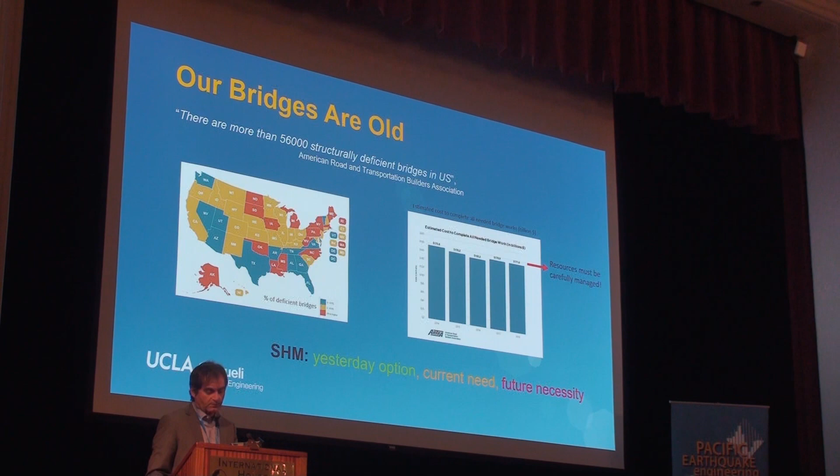So many of the agencies who own these assets used to look at these maintenance efforts and monitoring, structural health monitoring, as an option that they would do or not do. They did not necessarily believe in it all that much, especially instrument-based rather than vision-based methods. And I think the agencies are currently thinking about this as a need. Structural health monitoring became a need in their portfolio. And I believe, given the increasing vulnerabilities and exposure, and of course reduction in sensor costs as well as improvements in inverse problem solution methods, I think they will soon start viewing structural health monitoring as a necessity.

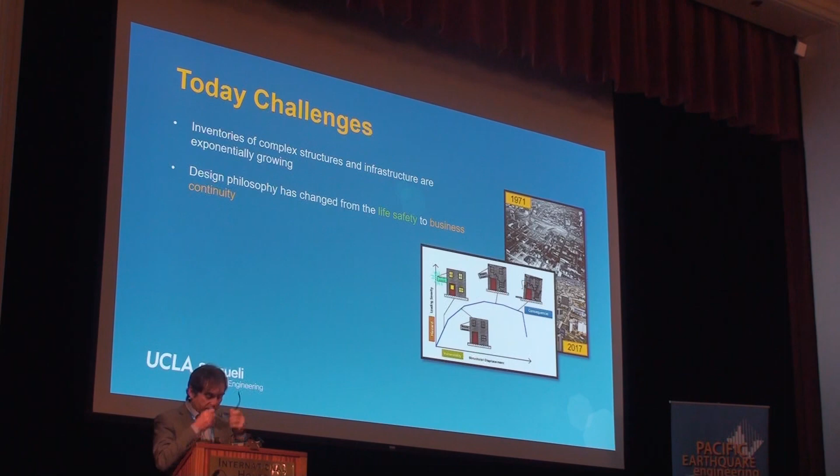So inventories of complex structures and infrastructure are exponentially growing. In maybe some of the Western developed countries, the growth is not necessarily exponential, but there are many countries in the world that are building like crazy. And then the design philosophies have been changing from just life safety and collapse prevention to business continuity, which means the performance requirements are increasing. And to be able to meet those things, we need to really monitor the structures more closely to see whether they're degrading or they're meeting their performance criteria.

And losses and closures will cause indirect costs, and through our regional assessment methodologies, all the talks that we have listened to yesterday and today, we know that the indirect costs are immense. And maybe we're just realizing or are able to quantify these indirect costs. And I think when we bring this information to the forefront, maybe structural health monitoring is no longer going to look like a more expensive option that the agencies have shunned in the past.

What is the current practice? The current practice is pretty much a periodic inspection that involves sending somebody there and looking at stuff. And as you can imagine, it's a time-consuming, labor-intensive, and necessarily an expensive affair. And you can only inspect structures periodically, not continuously. So if something happens in between, you're going to miss that. And things can collapse, and that has happened. In Italy, it has happened. In Minnesota, it has happened. When you do visual inspections, often you have to close the bridge to traffic, so this is going to cause service interruptions. And last but not least, the assessment is typically subjective and prone to human errors.

You can send to the same bridge two different people, experts, engineers. They may come back with different assessment results. And of course, you have the invisible damages.

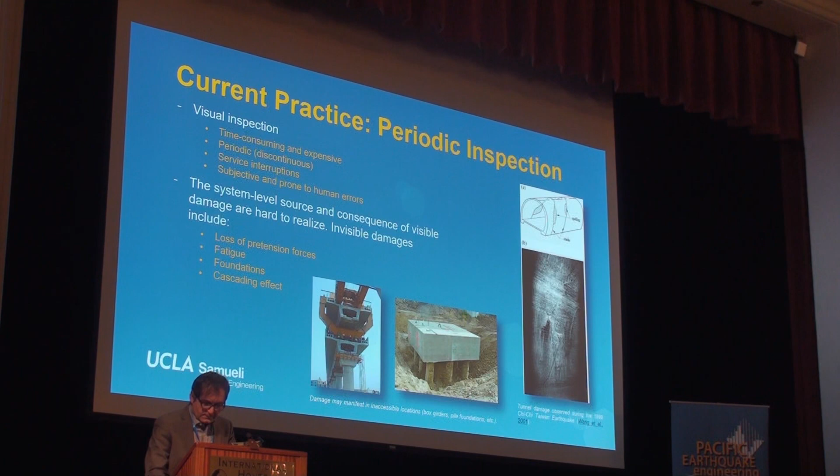If there's damage to a pile foundation after an earthquake, you may be able to get some evidence of that from a distance, from afar, by just looking at stuff. But you'll not be able to quantify it necessarily. If you have a tunnel lining that cracked, what does that mean? Does this mean that there's an imminent danger, or we can just kind of paint over? Now these will be things that periodic visual inspection is not able to catch.

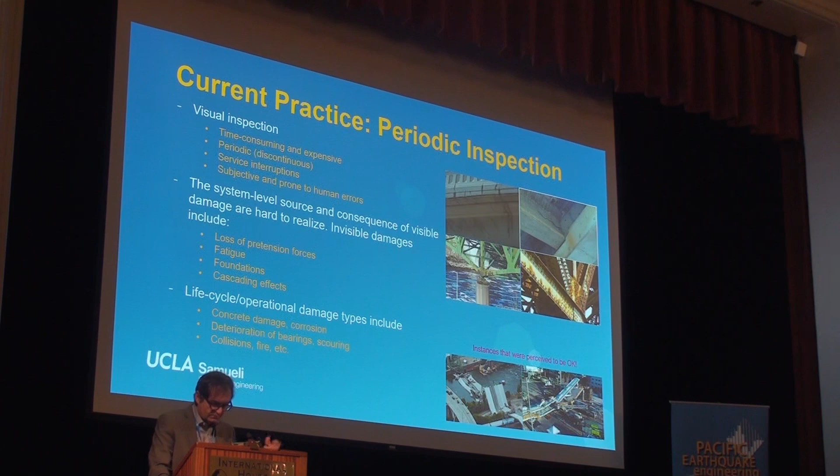And as I was mentioning, things have collapsed in the past, and these assets were being monitored through the current practice, so things have fallen through the cracks, if you will. After a major event like an earthquake also, we have the job of assessing damage and prioritizing which structures and bridges need to be repaired, whether some asset needs to be closed for service, like a rail line.

For example, in the Tohoku earthquake in Japan, Japan Railways had to inspect 1,400 different locations to be able to give a green light to the trains to begin. And if you don't have 1,400 people, expert engineers, that's going to take a long, long time.

So a health monitoring system together with its method, not just the sensor system, but the software, should allow us to detect damage, whether there's damage or not, and allow us to localize the damage. Where's the damage in all of this big system? Is it in the foundations? Is it there? Is it here?

But most importantly, the ideal system should allow us to quantify that damage, put numbers on the table. If there's a strength degradation, what is it? Is it 80% of the nominal, or is it 5% of the nominal?

In the interest of time, I'm going to speed up a little bit, but there are many threads in this world of structural health monitoring. One of them is the sensor-based solutions. We have seen different sensors that people are trying to synthesize. In the sensor-based solutions, you put a sensor at a place where you think something important or bad is going to happen, and then you can continuously monitor that.

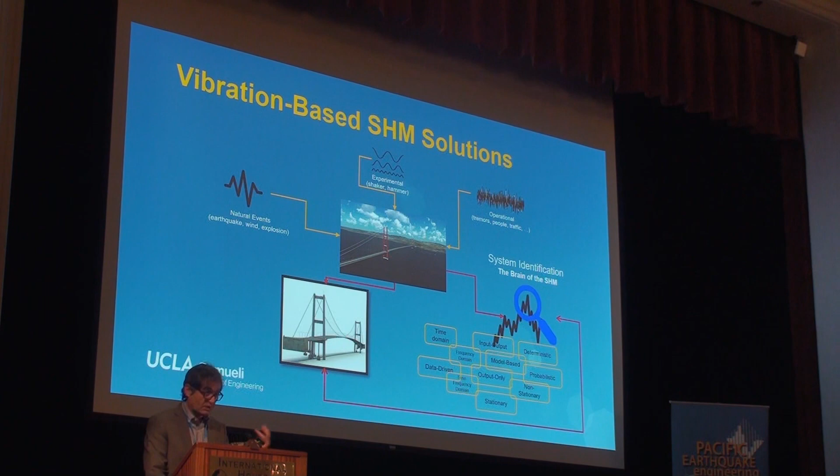And the data that you're collecting, you can interpret through a plethora of methods, some of which are useful, some of which have been invented as mathematical curiosities that do not really apply to real life. But you can interpret the data through different methods and then do the job of detection, localization, and quantification.

In this vibration-based structural health monitoring world, there are also different sub-threads. One of them is to just look at the sensor data and look for anomalies. So you can employ artificial intelligence, machine learning, or establish some threshold values to see if the sensor reading is off of that. The other one is operational modal analysis. And these two threads have severe vulnerabilities and very limited applicability, in my humble opinion.

The data mining approach, the data-driven approach, is training data dependent. They're not really predictive. They have large and yet unquantified uncertainties. There's really, again, no system level insight. And it also requires dense sensor installation. That works in our human body. We're organized in such a way that we have nerves everywhere and a really big brain. We can't really replicate that in the real world yet. So we cannot rely on these methods.

Operational modal analysis has also been the method of choice in my research community. But it is really also vulnerable because it has been based on very restrictive assumptions, which is that the response is linear because you're doing modal analysis. You're solving an eigenvalue problem that assumes that the system is linear, but the system is often not linear, especially when it's damaged.

And the most severe assumption is that the input exciting the structure is broadband white noise, and it never is, especially when there's a damaging event. If you have a high wind, that's a non-stationary, non-white noise, colored excitation. So if you're doing operational modal analysis to identify this or that, your results are all polluted by this mismatch of your model and method to the physical reality.

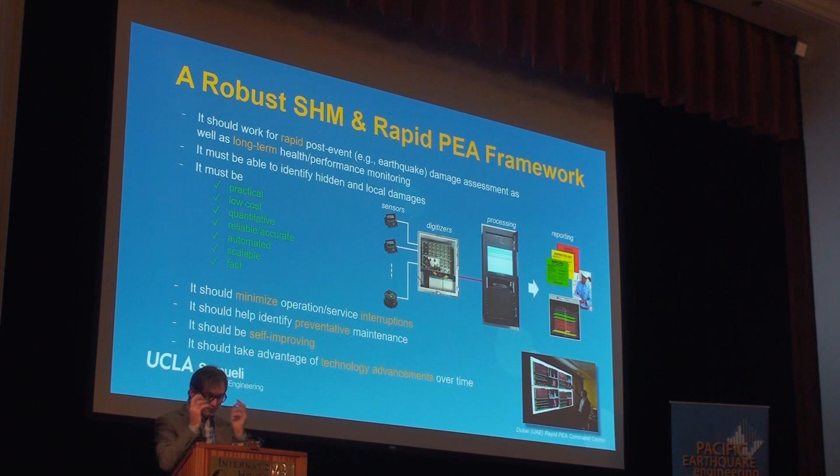And if your damage signature is below that baseline, you can hardly ever classify that signal as damage because that's just the baseline moving around. So if you don't have a system that adapts, uses all the accumulated data and understands the system better, it's not going to work out. So our approach has been, and we came to this little nook by making all the mistakes that I'm mentioning above. So it's just like a painful, but in the end rewarding, I think, journey to learn from the mistakes.

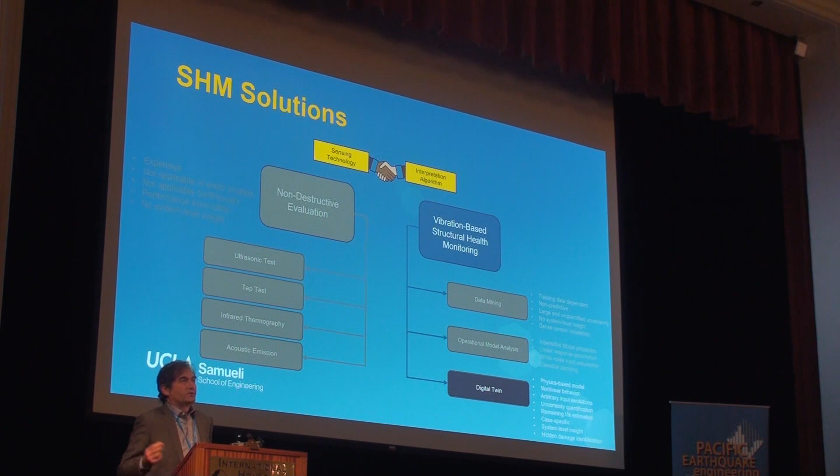But now I think personally, and some other people would also join me in saying, that we need to really use physics-based models. We should be able to consider nonlinear behavior, should be able to consider arbitrary input excitations that are non-stationary. We should be able to not only estimate the level of damage, but also provide our uncertainty of that estimate. You know, if I tell you the damage to the beam-column connection, the strength is degraded by 15%, but my uncertainty is plus or minus 50%, that's probably not a good estimate, right? So I need to be able to say what my uncertainty is as well.

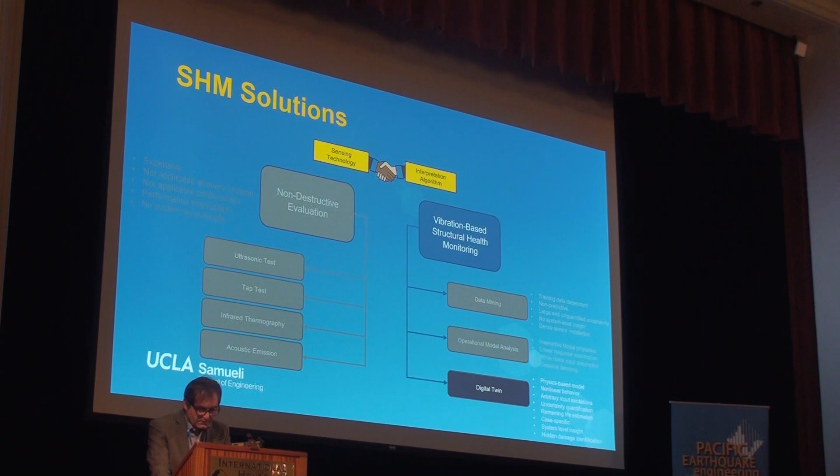And I should be able to also tell you through my observations what is the remaining life of this particular member. How many times has it been cycled towards the design limit, to a certain threshold, so that I can do fatigue and life estimates. It has to be case specific, it should be able to handle earthquakes, winds, etc., and provide us with system-level insight and allow us to identify the hidden damages.

So this is just a list of the things that I have done with my group over the years and with some colleagues, but to get to where we are, it took us more than a decade of study and learning from other people. Right now, in a nutshell, we have a digital twin-based damage identification and health and performance monitoring system that can address different needs. We can do operational condition assessments. We can also do rapid post-event assessment. These are different modalities, and they require different sub-algorithms to handle.

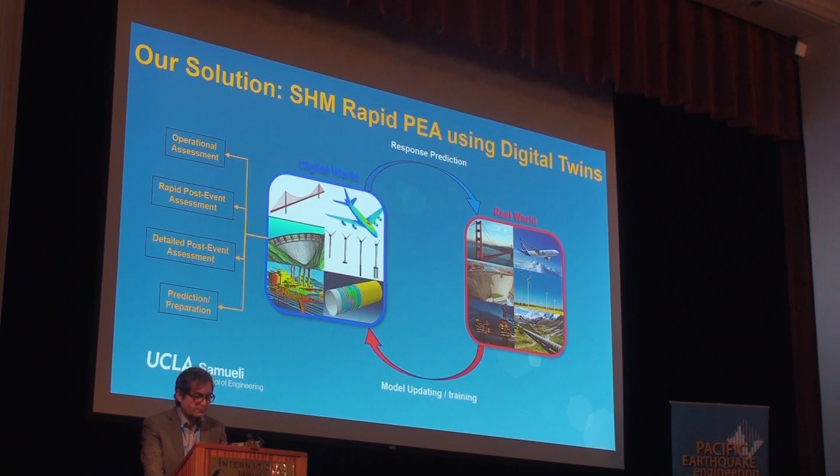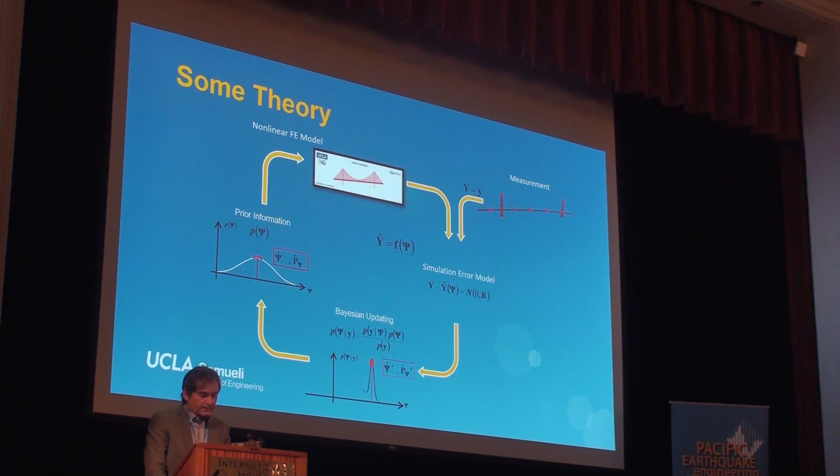We can also do detailed post-event assessment, and we can also do scenario-based prediction and preparation using the updated digital model to see how it might behave in a particular type of future earthquake that hasn't happened yet. There are a lot of mini algorithms stitched together supporting the system, but this is the overarching algorithm, which is Bayesian estimation theory. So you create a model, and the properties of that model are represented by a probability distribution function. And then you make observations and you update the probabilities, and your estimate gets better and better.

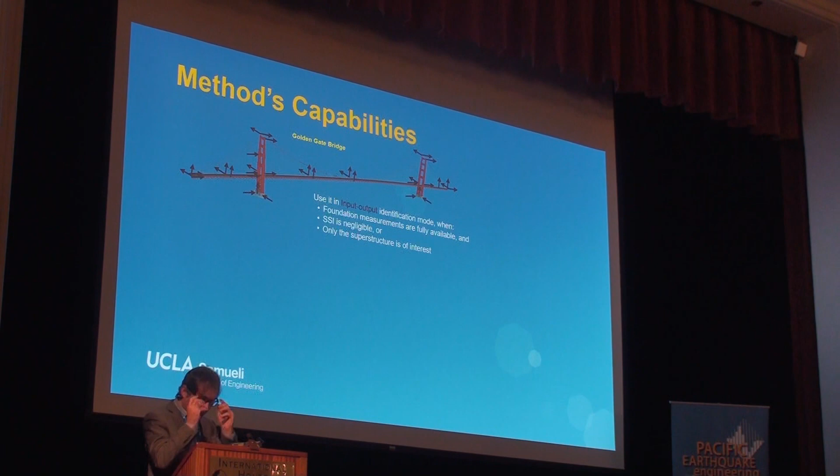We've been able to apply it to large structures such as the Golden Gate Bridge in different modalities, where in the Golden Gate Bridge there's no soil-structure interaction. It's sitting on good rock. And we have sensors on the piers, so what we're measuring there is the pure input motion. In a soil-structure interaction case, those will not be pure input motions, but we can use it in this input-output modality. There are other bridges like the Vincent Thomas Bridge where you don't have the full set of measurements, so you have only partial knowledge of what the input excitations are.

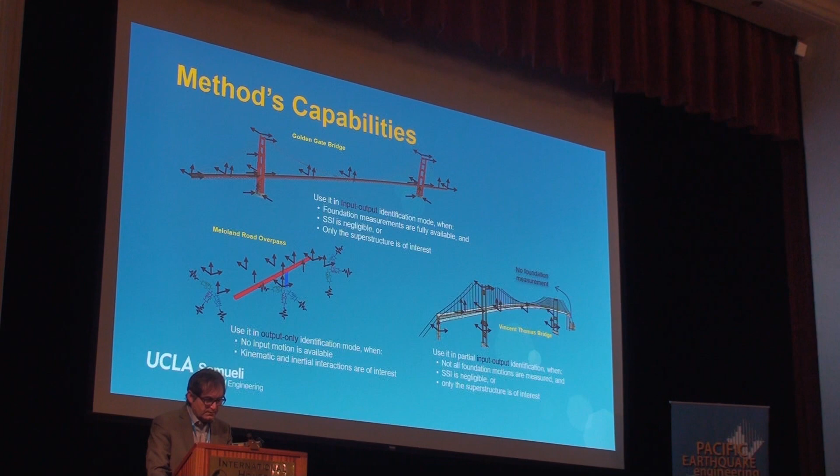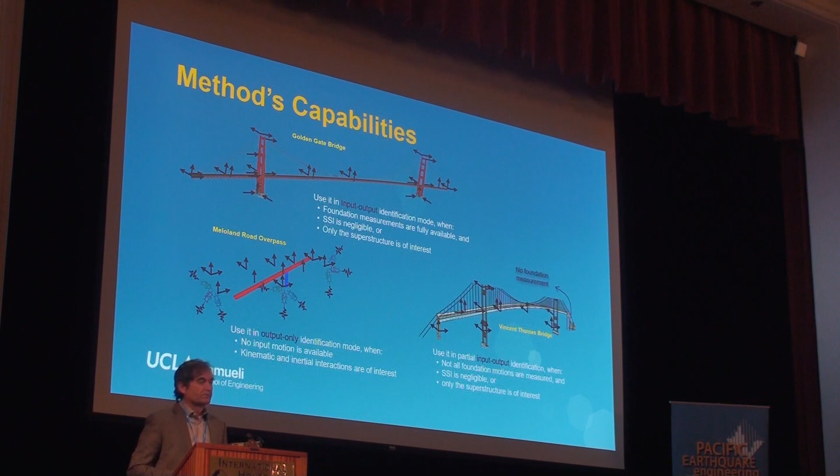We can use it in that modality. And there are many other bridges where you have no idea what the input is, even if you have sensors in some foundation or pier system. Because of SSI, what you're measuring is not pure input, so you have to do it in the output-only modality. So we have done stuff like that.

So over time, we have progressed from theoretical problems to real-life applications supported by many projects from our state agencies and some federal agencies. Some of these projects are ongoing. So here's a project that we carried out some years back for Caltrans, who were interested in the Samoa Channel Bridge in Eureka, Northern California. It's a water crossing bridge. And the superstructure is relatively simple.

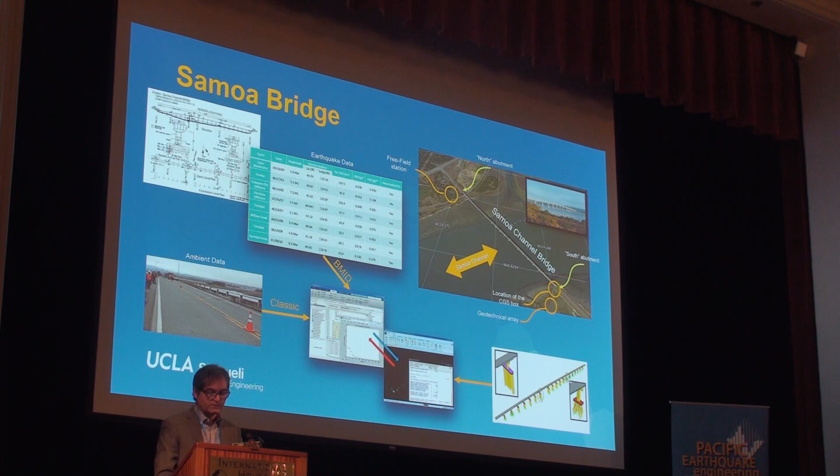And what they were wondering was, what are the dynamic foundation stiffnesses of this water crossing bridge? It's on soft soil naturally. And there were many earthquakes recorded on this particular bridge. So we were using these projects to refine and hone our methods, and this was sort of a seminal project for us. And we were able to create the so-called blind modal identification method with which you can handle these soil structure interaction problems that have nonlinearities.

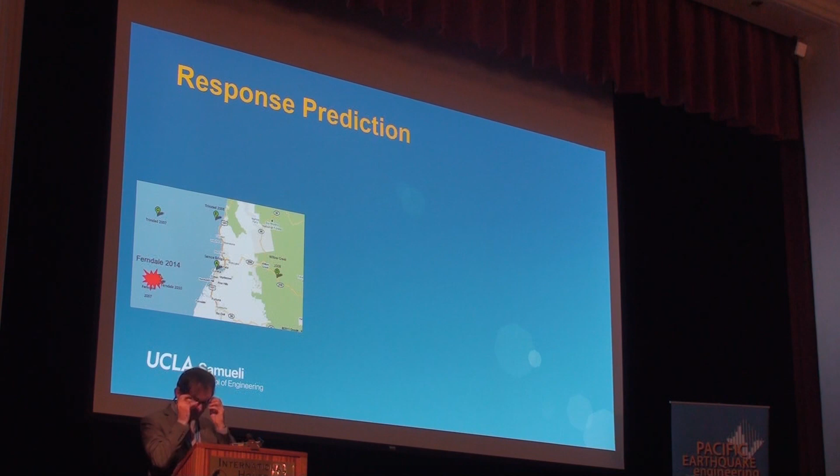So we have used 6 or 7 past earthquakes to estimate the dynamic foundation stiffnesses, and then we submitted our report to Caltrans, and then another earthquake happened. And then we had to do a sort of a blind prediction. We have used our digital twin that was calibrated from prior earthquakes to blindly predict what happened in the 2014 Ferndale earthquake. And so these are the Class A blind predictions of what is recorded on the bridge during that earthquake and what the digital twin is predicting.

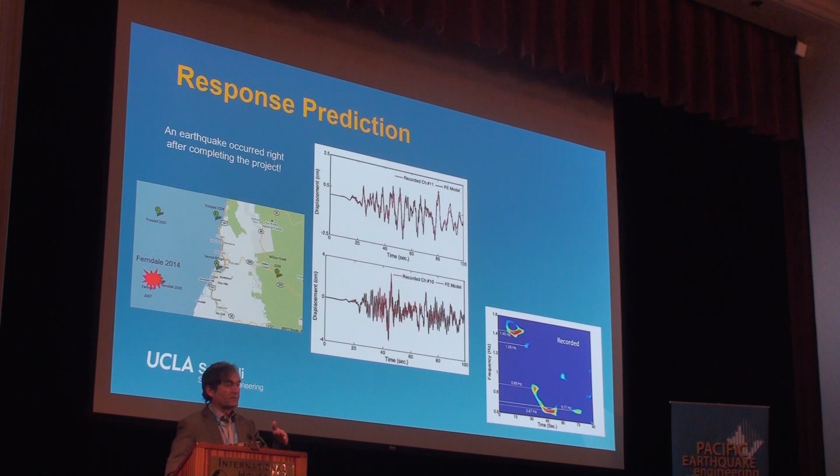This is a particularly difficult case, and there's a big report on that, but the particular difficulty lies in the fact that soil behaves non-linearly during that earthquake. So there's some soil softening which recovers after a while from the earthquake, but this is an application that kind of gave us a good momentum in our efforts.

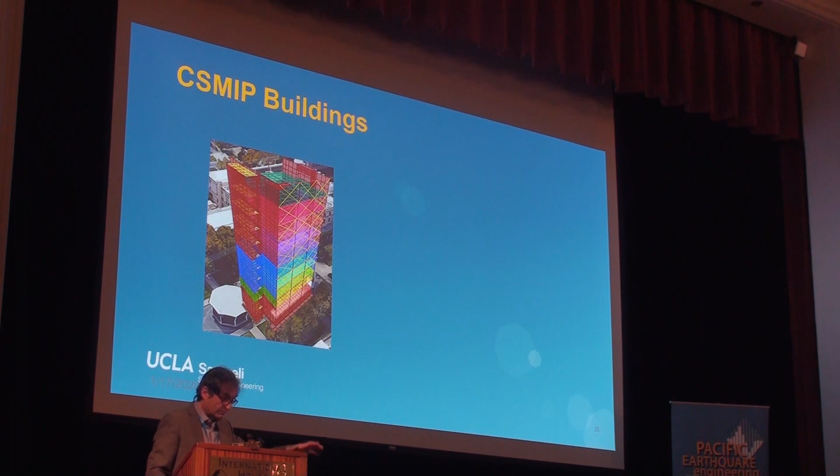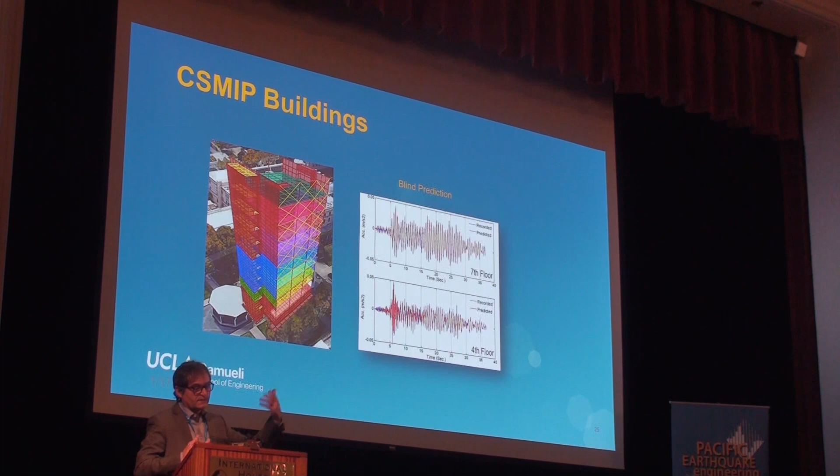We've also refined and honed our techniques with data from the CSMIP buildings, California Strong Motion Instrumentation Program buildings. This is the Millikan Library, the famous one. And it is also particularly prone to soil structure interaction because it is a very stiff shear wall and a relatively soft foundation. So we've created a digital twin of it and used past earthquakes to back calculate its frequency-dependent foundation impedance function, which itself is a challenge. And then we have used the calibrated digital twin together with its dynamic foundation model to predict its behavior in another earthquake. These are comparisons of recorded versus predicted measurements.

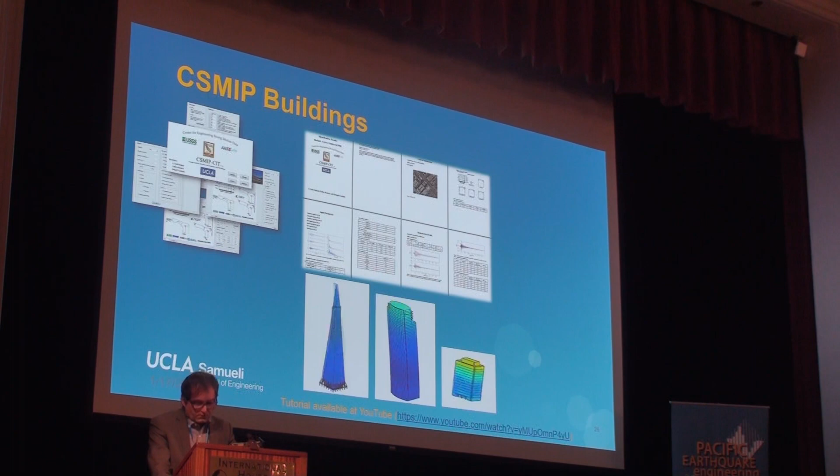We have packaged versions of our tools for processing seismic data. We have a version that works on different types of buildings, which sucks in the data from the Strong Motion Instrumentation Center. It processes it. It outputs an automated report. This is a layout of the report. It also helps you visualize the behavior, etc. We have also worked hard to make it work for large structures, large bridges.

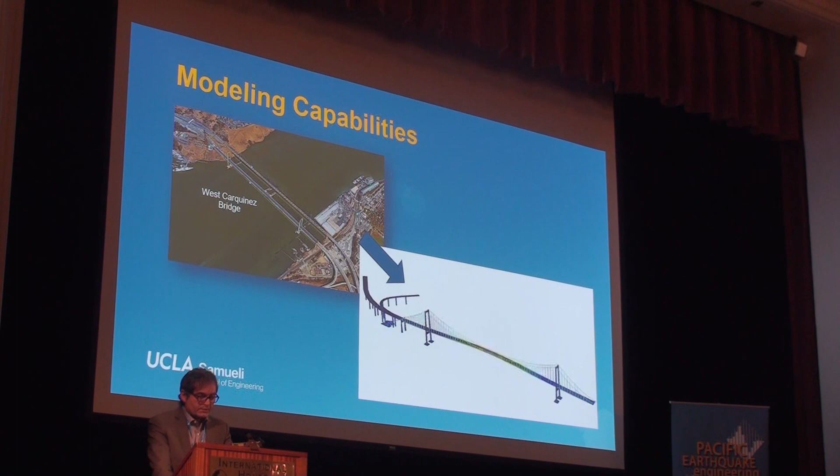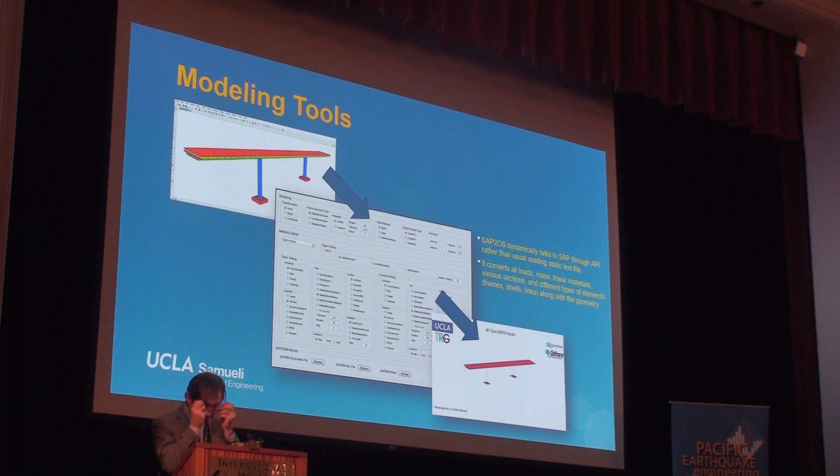And we have created some workflows that allow us to basically create models of bridges, often from images alone. And then we have to stitch different modeling tools, for example, SAP2000 or OpenSees, which are wrapped inside our Bayesian estimator. So all of these things had to come together so that we could basically apply it to a large set of tools. We are also creating a version of it for bridges.

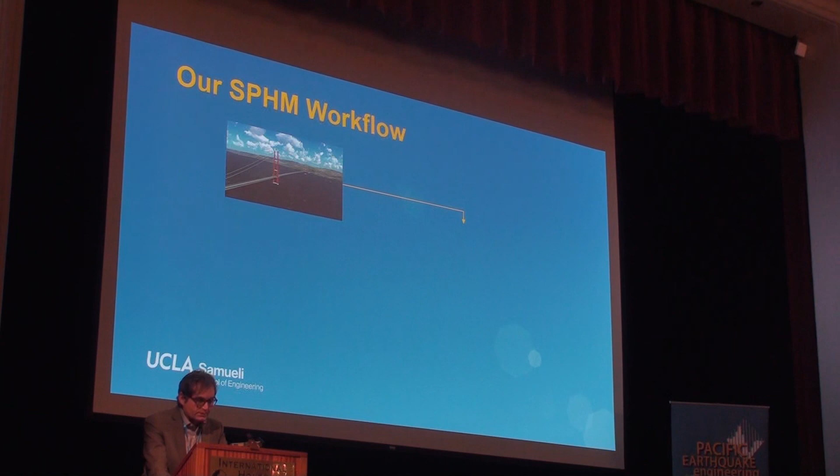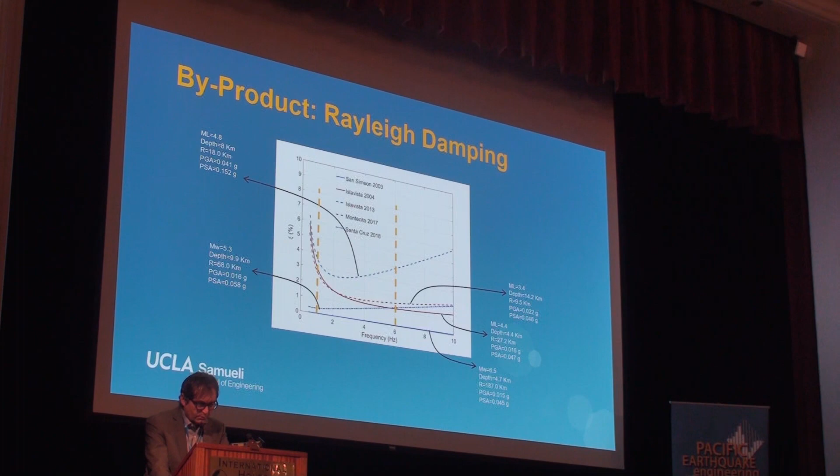I am going to just maybe go to one last example where we are working on a current project for FHWA. And this is for performance monitoring of ordinary bridges. Ordinary bridges will suffer damage, and the damage is only visible when you have significant heavy traffic on it. From ambient vibrations, you cannot get this damage. And when the bridge is traversed by many vehicles, the excitation is non-stationary and they're not measured. You do not know precisely what weight that truck has, and there are multiple vehicles passing, etc.

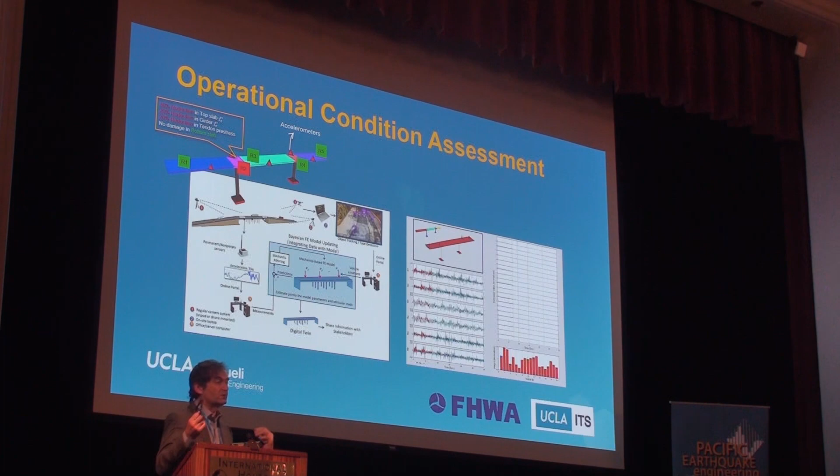So you do not know the input, but this is the only kind of input that can help you get a signal of the damage. So we have devised our methodology that works on windows of data that not only estimates the damage, but also estimates the weight of the vehicles traversing the bridge. And for that, our algorithm was falling a little bit short, so we aided it with cameras. The cameras are trained on the traffic, and they classify the vehicle based on the image, whether it's a light vehicle, heavy, etc. And then it also approximately determines their relative location from an abutment.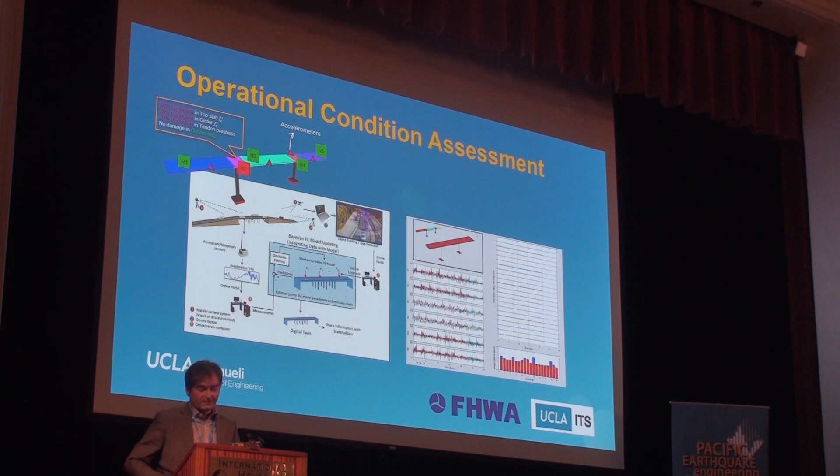And we use that information and refine the load estimate of multiple vehicles, together with the delamination damage that the bridge has. This is an SBIR Phase 2 project, so if we can convince, for example, Caltrans or other agencies, and we're doing some field tests to prove it, because we can do it on paper, then they may adopt it on a whole scale, and so that'll open new avenues.